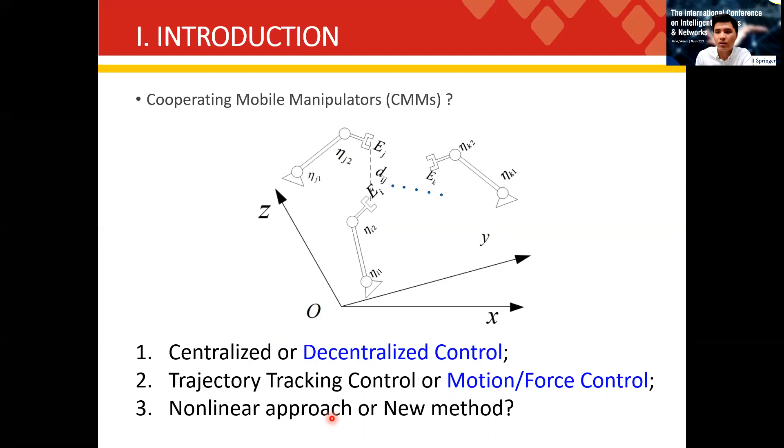For cooperating mobile manipulators, CMMs, the control objective was classified into several situations depending on the control design requirement: trajectory tracking control or motion force control, centralized or decentralized control. However, almost all existing control strategies for CMMs are implemented by a non-linear approach. As a result, it is difficult to handle the situation of actuator saturation and full state constraint.

This paper considers a novel direction of employing the optimal control for CMMs with the adaptive reinforcement learning ARL technique. As we have known, it is hard to analytically solve the Hamilton-Jacobi-Bellman HJB equation, which is an intermediate step of finding the optimal controller. To overcome these challenges, the approach using ARL technique is able to solve online the HJB equation to obtain the optimal scheme.

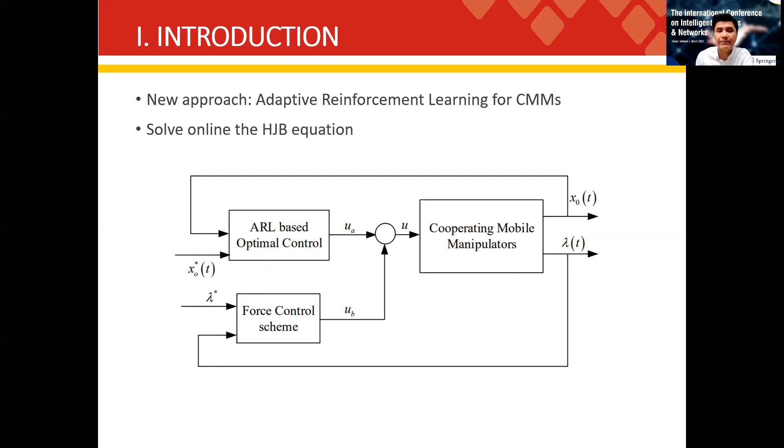So what is our problem? We investigate n cooperating manipulators as shown in figure 1. The interaction between the manipulators leads to a constraint condition as depicted in the following equation: Xi ij equals 0. Eta is the joint vector of the n cooperating manipulators system. The dynamic equation of n robot manipulators with constraint force by interaction between a couple of manipulators can be described as this equation.

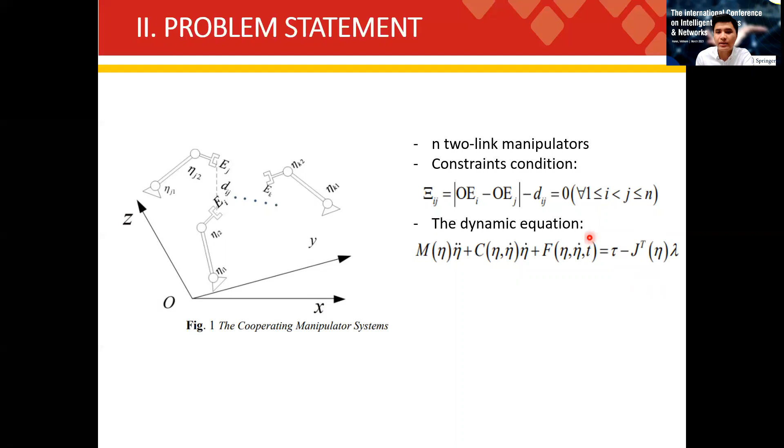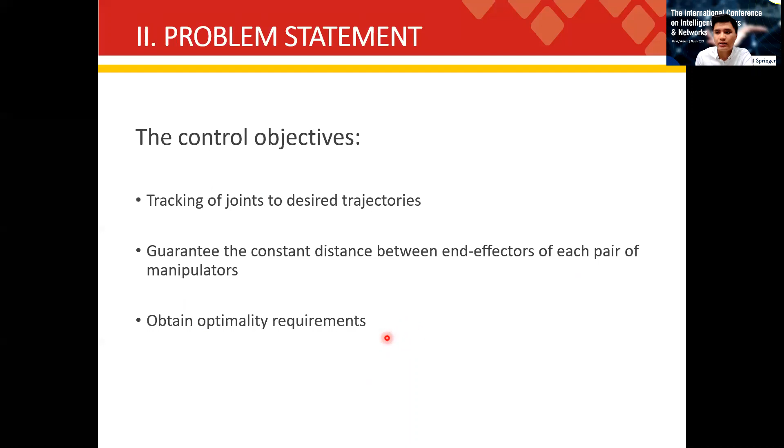The control objective is to obtain not only tracking of joints to desired trajectories, but also guarantee the constant distance between end-effectors of each pair of manipulators. Moreover, the motion force control objective is also mentioned in the Lagrangian coefficients. The consideration of ARL technique in control design has achieved optimality.

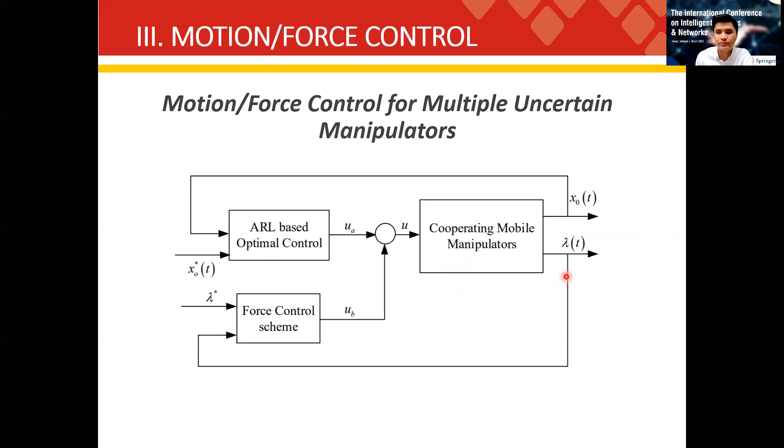In this section we focus on the motion force control scheme for multiple uncertain manipulators as described in figure 2. It will be seen that the robust control algorithm is a starting point of ARL-based control design. Furthermore, the stability will be mentioned in this controller. First, we analyze the robust controller for multiple uncertain manipulators.

In order to obtain the motion dynamic model, the constraint force J transpose lambda needs to be eliminated by multiplying the matrix P on both sides, and we have this, the completed motion dynamic model. The constraint force can be obtained by FC. We see here tau parallel includes two members, tau parallel independent and tau parallel dependent.

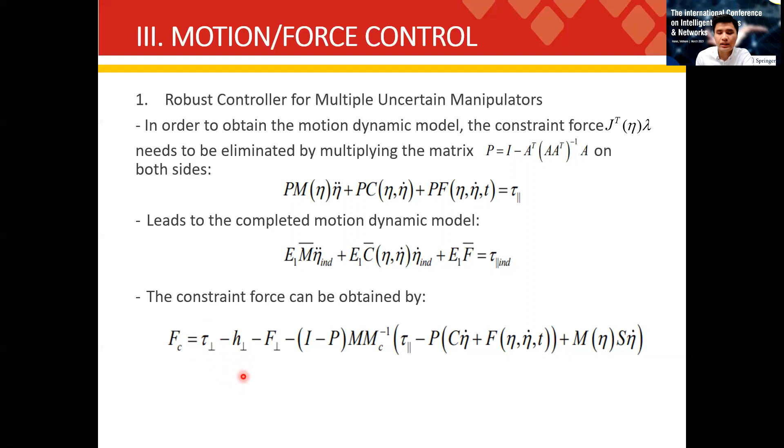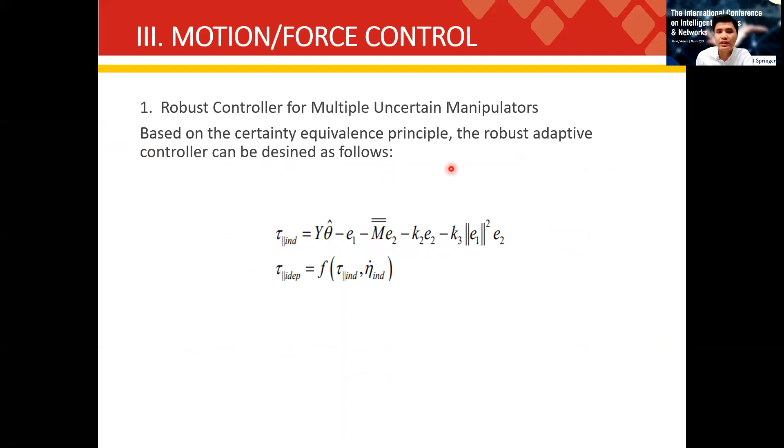Tau perpendicular is for control force. The total control input is the sum of tau parallel and tau perpendicular. We have here the control law for tau parallel independent and tau parallel dependent. Based on the certainty equivalence principle, the robust adaptive controller can be defined as follows.

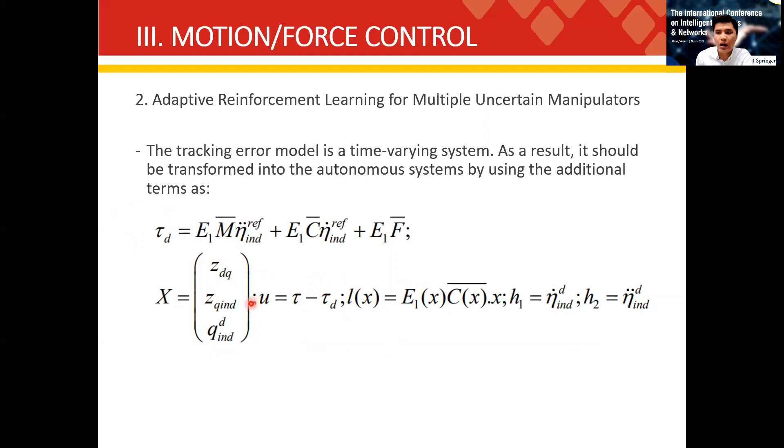In this section, we further extend the results in the previous section to ARL-based control design with the consideration of the motion dynamic model and the appropriate tracking error model. It can be seen that the tracking error model is a time-varying system. As a result, it should be transformed into an autonomous system by using the additional term, defined tau D as the feed-forward term. We have augmented state variable x. Then we obtain the time-invariant system x dot.

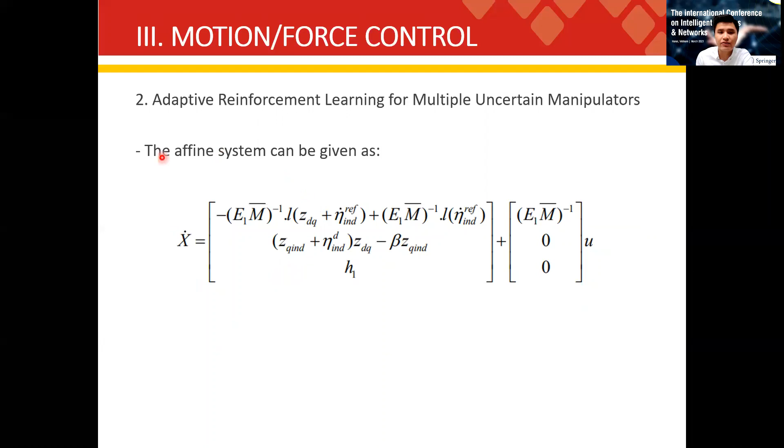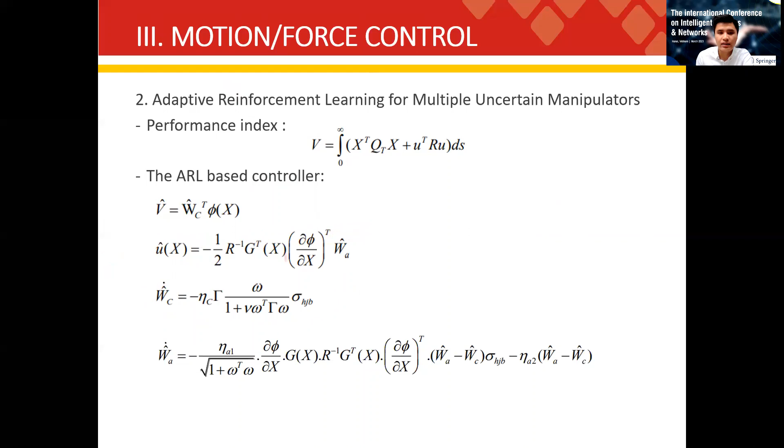Therefore, the ARL-based controller can be proposed with performance index like this, V. We use neural network approximators to find the solution of the HJB equation, V hat and U hat. Then the update laws for critic weights and actor weights are like this.

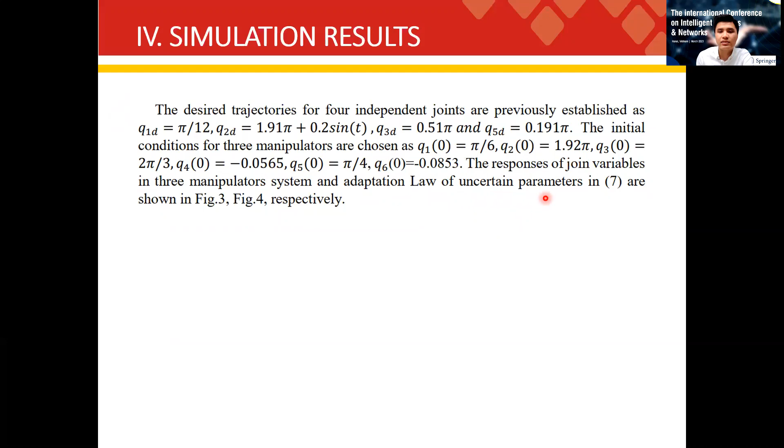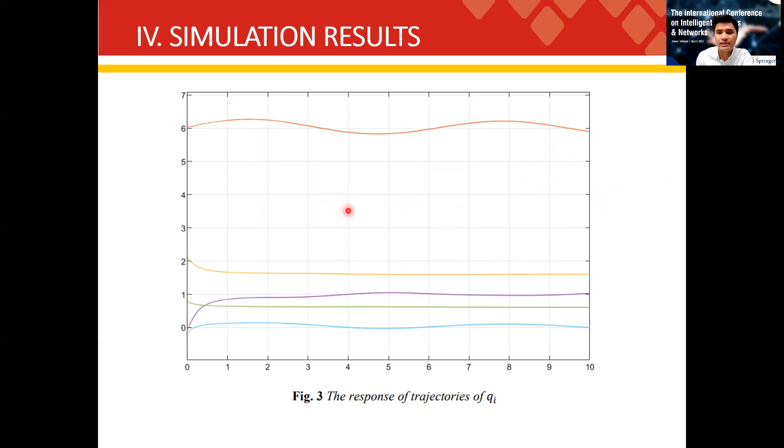In this section, the system containing two-link manipulators is considered in simulation with the purpose of validating the proposed controller. The desired trajectories for 4 independent joints are like this. The initial conditions for 3 manipulators are chosen. The responses of joint variables in the 3-manipulator system and adaptation law for uncertain parameters are shown in figure 3 and figure 4 respectively. We can see in figure 3, all joint variables follow the desired trajectories. And figure 4 shows the convergence of estimated parameters.

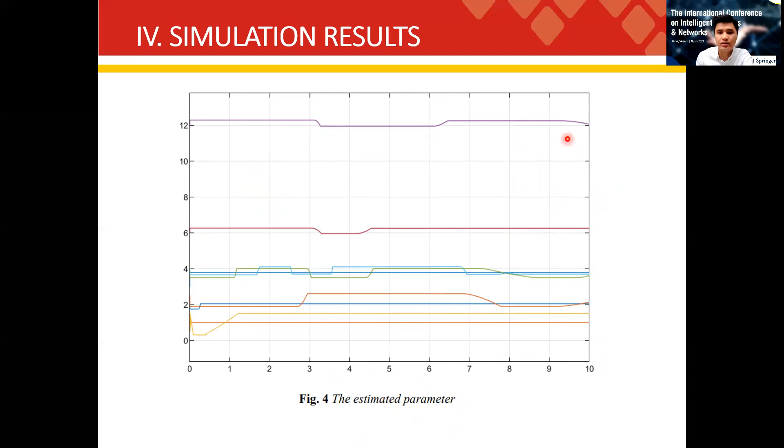So in this paper, ARL-based motion force control has been proposed for solving the optimal control problem of multiple uncertain manipulators. The motion force control structure is given to develop the ARL technique based on the motion dynamic model after the separation technique of cooperative manipulators was implemented. However, the control design requires the ARL-based solution for time-varying systems. For this reason, the additional term tau D is proposed to handle these disadvantages. Finally, the online actor critic ARL is developed with neural network and optimality principle for the modified motion dynamic model.